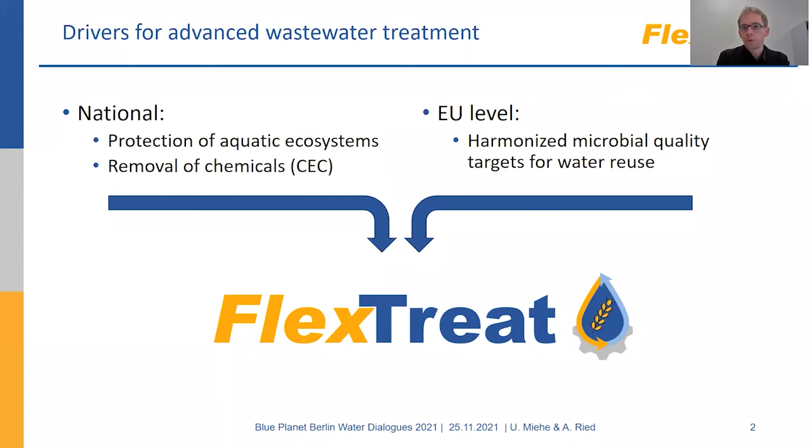This is FlexTreat, where we look at different technology combinations, which always aim to fulfill, on the one hand, the chemical removal to protect soil ecosystems, to avoid the transfer of micropollutants to the crop, but also to allow surface water protection when we do not need water reuse.

Well, so here we focus on a pilot plant which is located in Brunswick, like Braunschweig. So you already know the Abwasserverband Braunschweig, so they're also part of this project. So basically it's set up of an ozonation unit to remove chemicals, then a filtration unit, which is a post-treatment after the ozonation. So ozonation should always be followed by a biological post-treatment, and then a UV disinfection to really get very low with the microbial contamination.

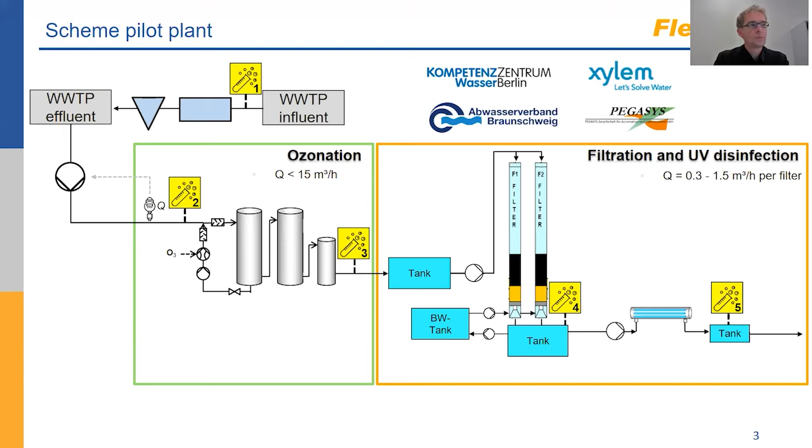Of course, we do not start from zero. So we have been researching ozonation for a lot of years now. But first, let's have a look at the quality targets we want to achieve. And now it becomes interesting. This is also a bit like what our digital twin should do. So on the one hand, we have targets for the ozonation to remove a certain list of chemicals by more than 80%. But this is a compliance level on an annual average.

We want to bring down the turbidity to lower than 1 milligram per liter to be controlled online. And then the EU directive asks for below 10 E. coli per 100 milliliters if you want to do unrestricted irrigation. And here the compliance level is weekly sampling, 90% of the samples. And this is basically the field of play where we want to use our digital twin, how to simultaneously control these three targets without boosting energy consumption or cost.

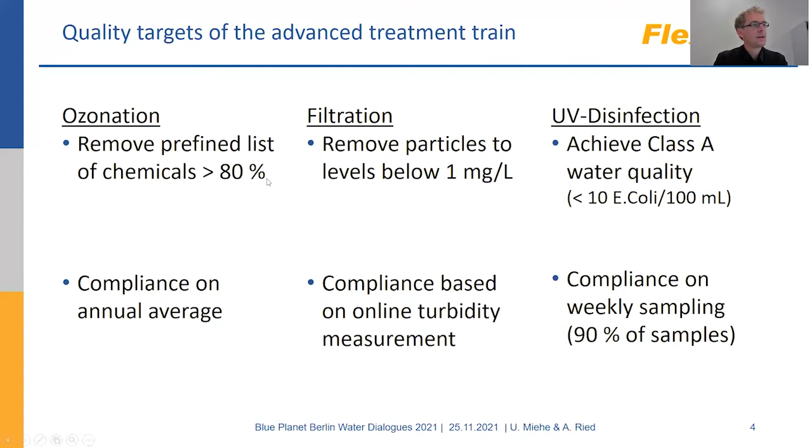So if we have a look a bit at the background, of course, we will build on proven concepts for controlling such plants like ozonation. Just measure the UV absorbance in the water before and after ozonation. And the more you reduce the UV absorbance, the more delta UVA you have, the more trace organic removal you will have. You can see this here in this graph for two typical compounds. Benzotriazole is a corrosion inhibitor, and valsartan acid is a metabolite of a pharmaceutical. So you see here from different pilot plants or lab scale experiments, the higher your delta UV is, the higher your pharmaceutical removal is. So that's easy.

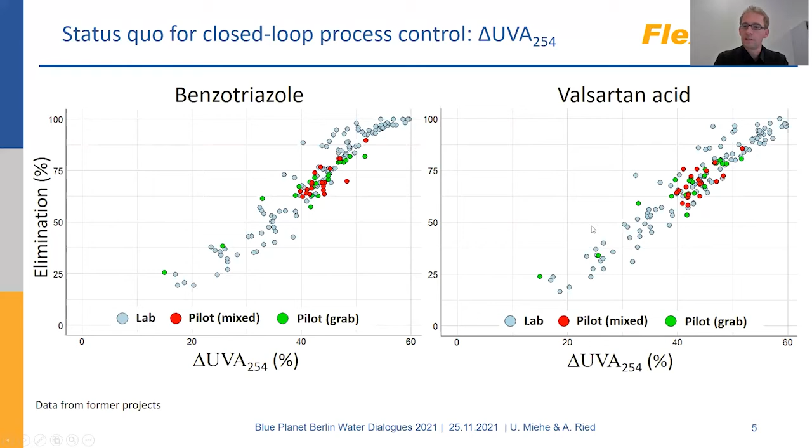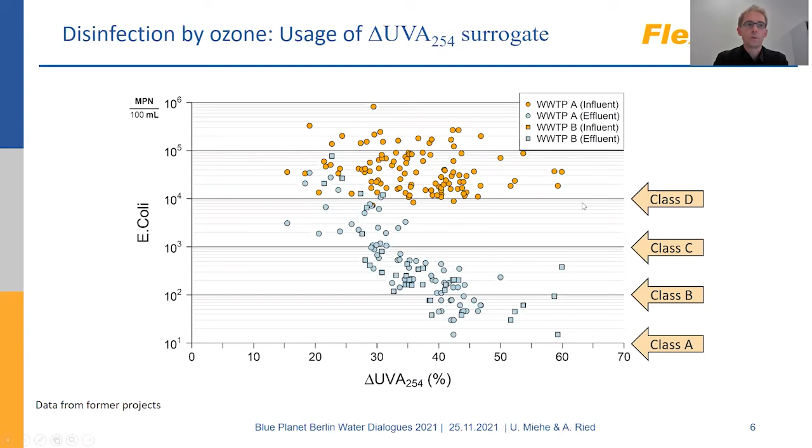If we apply the same concept for disinfection. So what you see here now is the E. coli concentration in yellow in different secondary effluents, and then in blue after ozonation. And here what you can see, it also follows a similar trend, but don't be fooled. This is a log scale unit. So in reality, of course, you have a factor of more than 100 between those data points. What you see also here on the right hand is, okay, these are the water quality classes in the EU regulation. So we come from D, C, B, A, and A is where we want to go.

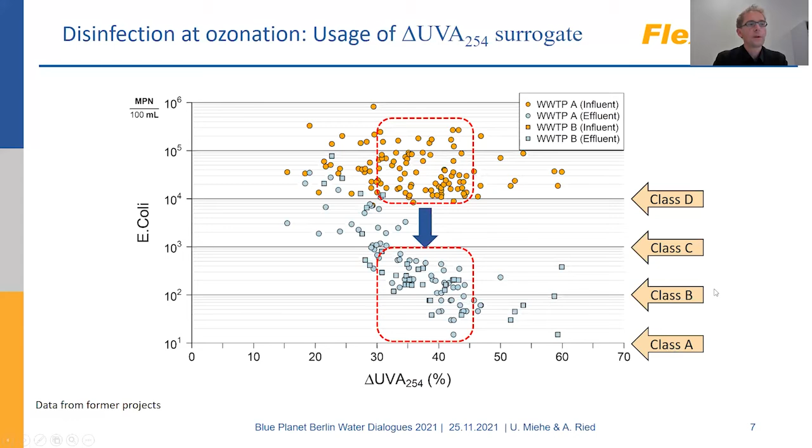One aspect which also should be part of a digital twin is quality control. We need a lot of surrogate parameters like UVA, turbidity, we will have temperature also included. And especially if you go for things like UVA, digital twin sounds easy, but the one main difficulty is really the online sensors. So this is also something we need to look into. We have several years of experience with such sensors now, and their cleaning. So that's an aspect we also want to include in the digital twin.

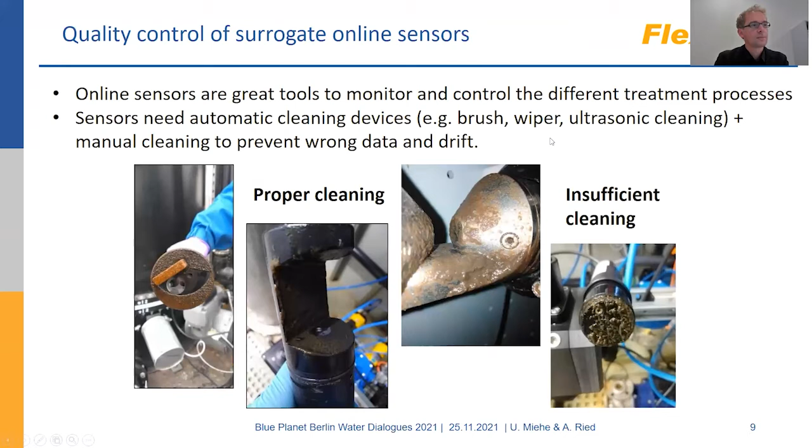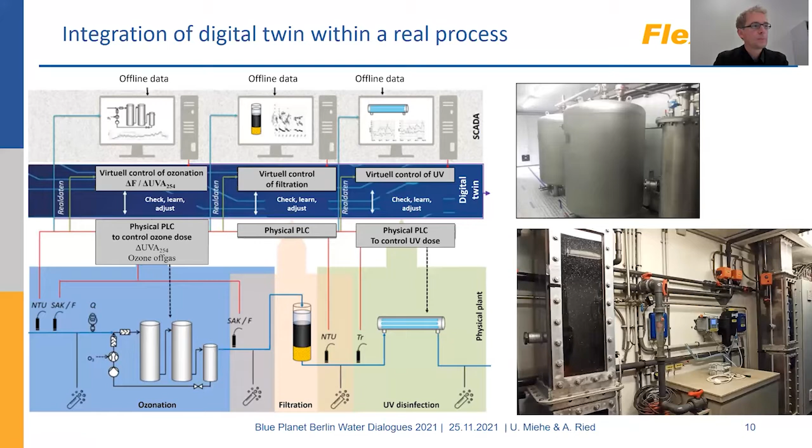We will feed, of course, the offline water quality data into it, because if we want to train the system, we need the offline data on microbial quality, pharmaceuticals and so on. And this will then all be merged together. That's basically how it will look. And now I will hand over to Achim, who will explain a bit more in detail how this will be done. So thanks, that's all from my side.

Okay, perfect. Also, let's see. Now I can't share the screen. Okay, now I think it should work.

Good. Okay, perfect. Ulf, thanks again a lot for taking part one. Now I'm continuing with part two. And before I step into a bit more discussion about the digital twins itself, I would like to summarize a bit the needs, because these are, I think, an important step one, to think about which specific needs should be satisfied or solved by a digital twin, right?

And we just heard from Ulf that with these wastewater reuse scenarios, the existing wastewater treatment plant probably will need to be upgraded with additional treatment solutions. So the need is there to manage and operate new, additional treatment equipment at the wastewater treatment plant. So the plant manager and operator has to take care of new equipment, maybe also new regulations, new targets, as we just heard. So the need is to achieve these requested targets with additional equipment.

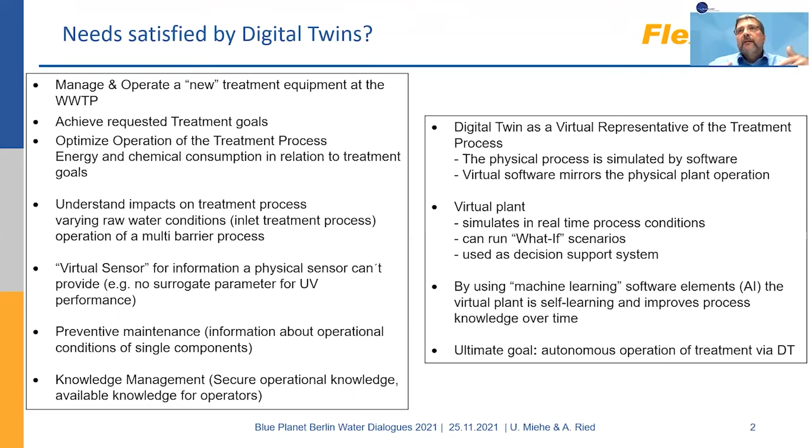And if we think further by adding so-called machine learning software elements, the digital twin can be self-learning and build up knowledge over time, which can really cover this topic of how to secure operational knowledge and make knowledge available for operators and managers. And the ultimate goal here is autonomous operation, and we will see and test at the end how that can be done.

Okay, let's move to the digital twin itself. The digital twin is not really new; it's been known and practiced in past years for municipal wastewater treatment plants. There are examples in practice where digital twins are implemented, for example, for optimizing biological processes. And important here, in general but also for our project, are the data sources. The digital twin needs the right input. Without the right input data, the digital twin can't work well.

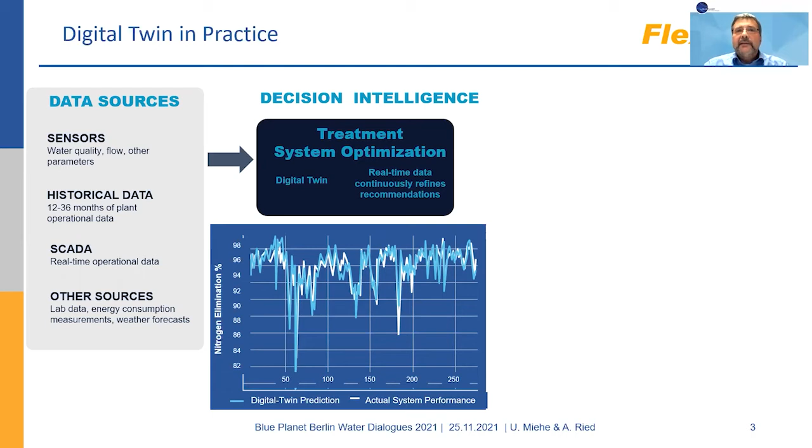So we have to check the availability of data like sensor data or data from the SCADA system from the real-life plant, and best would be if historical data is available from a plant to train the digital twin. That is done in practice for biological treatment systems. Here's one example on the screen where a digital twin is implemented at a biological wastewater treatment plant. The trained digital twin is predicting the nitrogen elimination rate. The blue line is the prediction by the trained digital twin, and the white line is the actual system performance, and you can see the trained twin predicts that quite well.

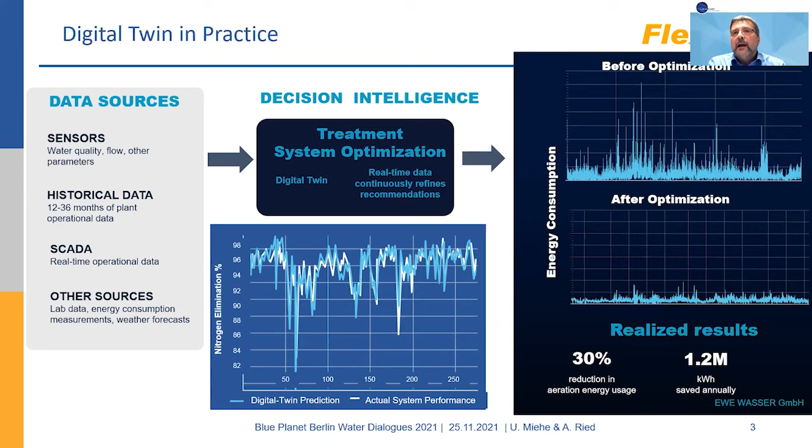And that opens the door to run and operate the plant with the digital twin to have optimized operation windows. For example, one of the key energy consumers at a biological treatment plant is the aeration equipment. And here, with optimized operation, the plant could reduce the energy used for aeration by up to 30%. So there are some examples where digital twins are used already.

And now we are back to our system here, as Ulf explained. That is a new, additional treatment train. So we need to collect information on that process to build up the digital twin. And I would like to mention that one important starting point, and what we did, is to describe very seriously the existing plant, the existing data set, the data points which are available from the existing PLCs of the physical plant, and also understand which lab data and other sensor data are available as data sources.

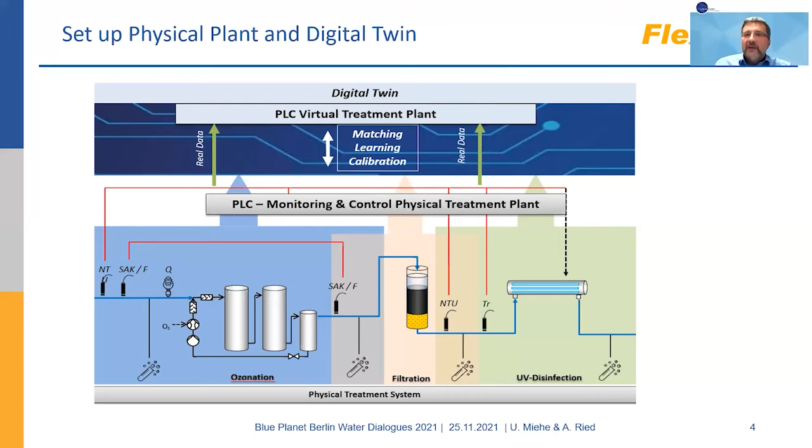And these overall data lists need to be understood by the modelers who are building up the virtual plant, the virtual PLC. In addition, we have to make sure we build up a setup so that the data transfer and data connectivity between the virtual plant and the physical plant are in place and that they can continuously exchange data, and you can then enable the system to match, learn, and calibrate over time.

And this is the setup we will have in Braunschweig. Here I would like to mention the two experts. We have two partners here who are experts in digital twinning: on the one hand, the company PEGASYS, and on the other, Aquatune, a Xylem brand. With the combination of this expert knowledge, we are building up the modeling and the programming of the digital twin.

And again, important here is that we see the master PLC of the physical plant, and then we see the PLC connecting modules to the virtual world. Really important, and that was my observation so far, is that you have to bring together the experts, the engineering expertise from the application engineers from the real world, the programmers doing the real world PLC, and in alignment so that both parties really understand what we are doing together with the programmers from the virtual world.

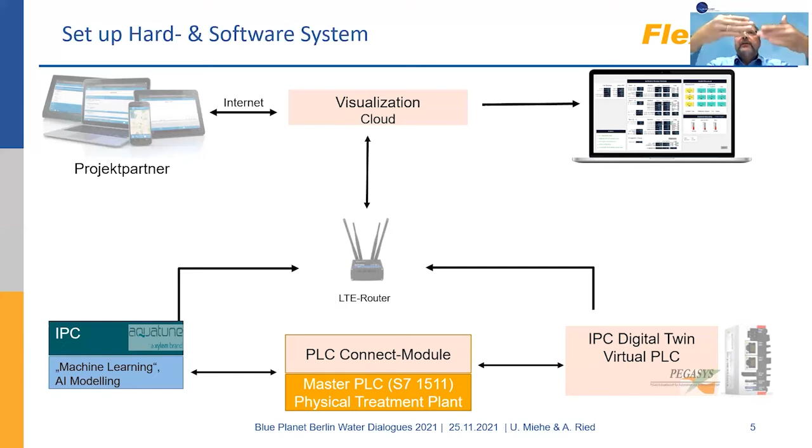Also very important is that we get in all the knowledge, application knowledge, process knowledge, as Ulf already explained, these knowledge equations we already know from ozone, UV, water matrices, these delta UVA equations. So all this existing knowledge needs to be brought to the table so that we can build the modeling on this information.

Some words on principles of modeling approaches: we will use a wide range of different types of modeling. On the one end, you have deterministic or so-called first principle models, which are known equations, physical, chemical, biological. The other part is the machine learning elements, where we will build on artificial neural networks.

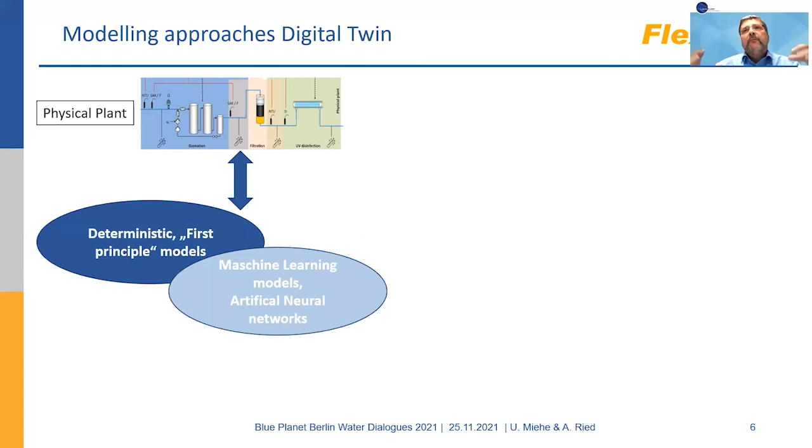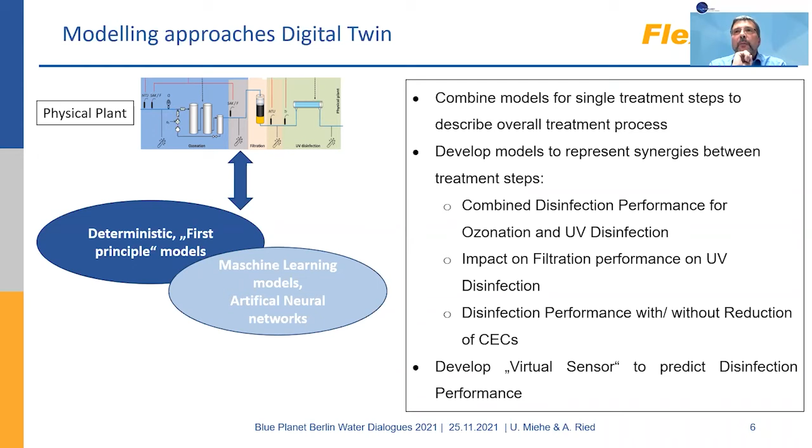We want to combine these model approaches so that we develop models in the digital twin which model the process performance on disinfection, the input from ozone, the input from UV, and how to play around with these two treatment steps to get different performances on disinfection, and also understand the impact of disinfection with or without elimination of these chemicals of emerging concern. The idea is to get out of all these data a virtual sensor to predict disinfection performance under different operational conditions.

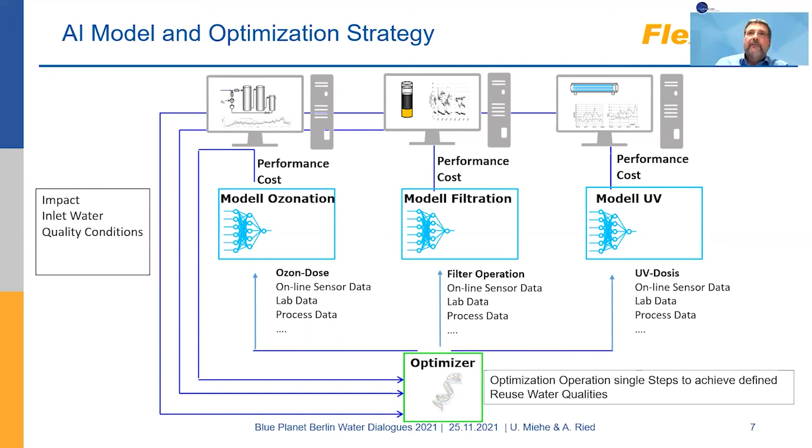So having said that, where are we in the project? The project started in February '21 this year. So far we have the physical plant installed. We had all the alignment for the setup from the physical data list and PLCs with the two expert companies doing the modeling. We have already decided on the hardware and software setup for the digital twin. And now we are in the beginning phase of getting the input data and starting the modeling.

But the project will still go until January '24. So there is enough time for different validation rounds with the digital twin, to understand, once the different models are implemented, how good the digital twin is as a decision support system, because probably not everybody likes to roll it out straight away to autonomous operation. So we will learn using it as decision support, and the operator still has the chance to decide what to do in the real plant. And finally, we want to see if this digital twin is able to run in an autonomous operation procedure.

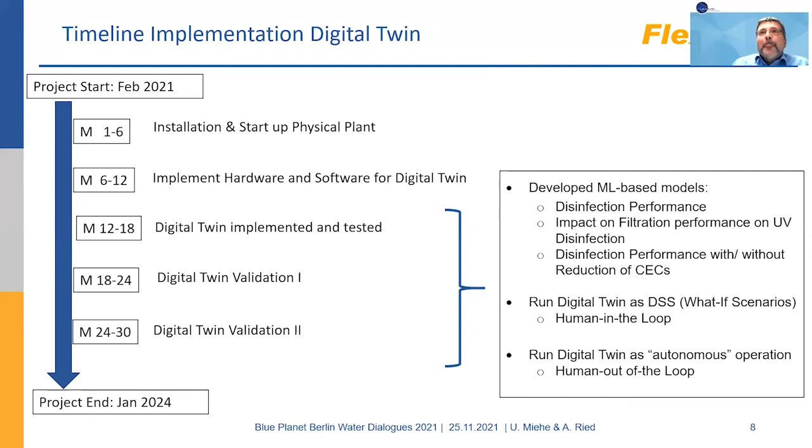So coming back to the question, can water reuse benefit from digital twinning? We think clearly yes, but we still need to validate, and we believe we can bring up results in the coming months and years.